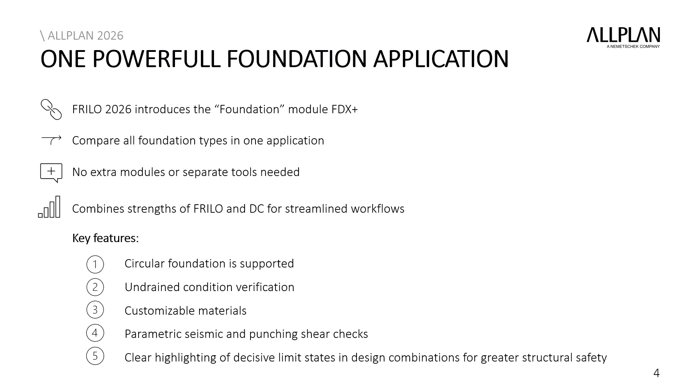By combining the functionalities from DC as well, we have brought together everything from both worlds, Frilo and DC, into one powerful unified program. There are also a few new features that we would like to announce as part of this update. Among them is the ability to model and design circular foundations. Smaller enhancements include, for example, the calculation of undrained conditions and user-defined material parameters that you can specify. And there are also parametric input options for seismic verification and for punching shear verification.

With that, I'd like to transition to the next area of expertise, the new features in the field of framework structures and steel construction. In our framework program RSX, there are many small optimizations in the input process, which we have summarized here for you in a clear overview. First of all, structures can now be mirrored in any way during input, and they can then be linked with the existing structure present before mirroring.

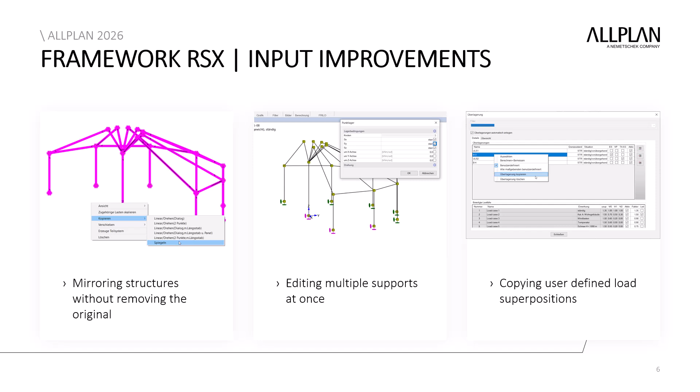Another optimization for data entry is the ability to edit multiple support points simultaneously. You can select several points at once and then adjust or modify their properties together in one go. In addition, you have the option to copy user-defined load combinations and paste them again so you can edit them afterwards. We have added an overview table for all load case combinations to improve clarity.

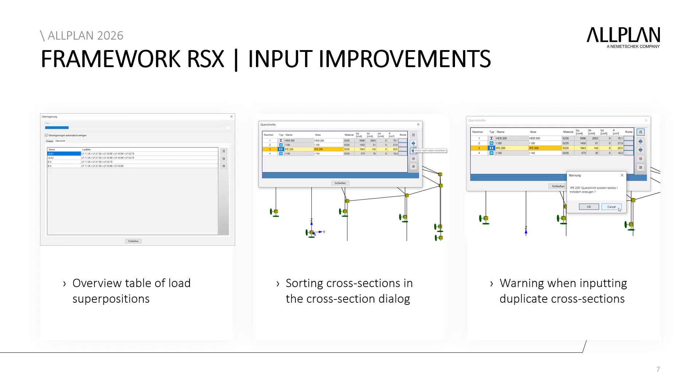This enhances transparency. Additionally, you now have the option to sort individual cross-sections in the cross-section dialog and to change and adjust their order. We have also implemented a warning in the cross-section dialog. If you define a duplicate cross-section, you will now be notified that the corresponding cross-section already exists. In the area of stability supports, we have added a visual preview to the input section to make data entry easier and transparent. In addition, member bars that are connected to a load panel can now be split into multiple member segments.

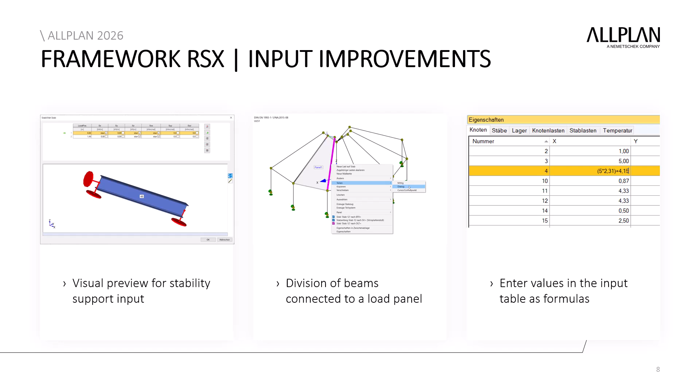Last but not least, we have added the option in the table inputs to enter formulas for the calculation instead of specifying the exact target values.

The next project from the area of program harmonization comes a unified, powerful steel connection program. To this end, we have combined all of Frilo's steel connection detail programs into a single program for design purposes. Options such as fin plate, end plate, splice joint, welded and bolted frame corners, typified connections, as well as the steel angle connection and the splice plate connection have all been harmonized into a single application.

Of course, you can also switch between the different types here. And of course, it is also ensured here that you can open all positions and all details that you created with previous versions within this new application. In addition, the unified program will of course offer the possibility in the future to be coupled and connected more easily and effectively with other applications.

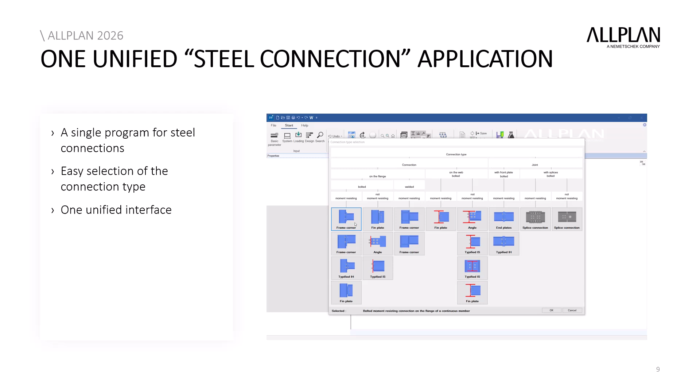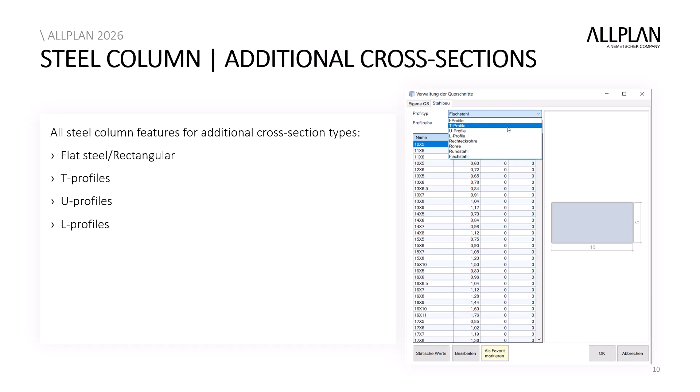Another innovation in the field of steel construction is the addition of new cross-sections in our proven steel column program. We have implemented 4 additional cross-section types there: rectangular flat steel profiles, T profiles, U profiles, and L profiles. With this expansion, we have now implemented all cross-sections described in Eurocode 3 for the design of steel columns. With that, I would like to transition to the next specialist area.

And at this point, I would now like to present to you all the innovations in the field of reinforced concrete construction. We will start with a new edition of the Reinforced Concrete Cross-Sections program. We have added new national annexes for you there. These are the national annexes for Belgium, the Netherlands, France, and the Czech Republic. Of course, before that, we already had the German and Austrian national annexes, as well as the annexes for Great Britain and Poland. And we have also implemented the base Eurocode so that we can now offer a very wide range for international projects.

At this point, it is especially worth mentioning that with the reinforced concrete cross-section verification, in addition to the usual verifications in the ultimate and serviceability limit states, such as bending with axial force, shear force, torsion, crack width, and stress verification, you can also perform fire design for rectangular and circular cross-sections using the general method. In addition, you can select the analysis of cross-sections with in situ concrete additions and with user-defined materials, as well as the calculation of effective stiffnesses.

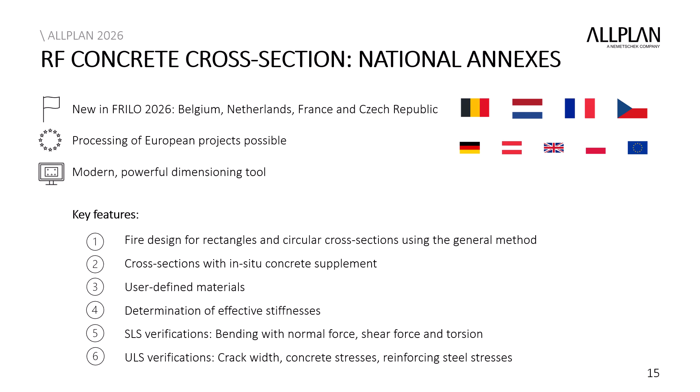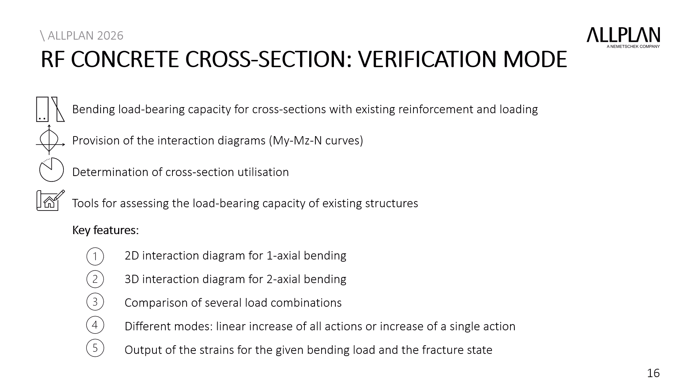It should be emphasized that the diagrams are two-dimensional when selecting uniaxial loading, while the interaction diagrams are spatial for biaxial bending. Within the diagrams, you can display multiple load combinations and choose between different modes. For example, this involves increasing the moment and the normal force linearly, or for example, to keep the normal force constant and determine a limiting moment instead. Another new feature is that now the strain is displayed not only for the failure state, but also for the current loading condition. With that, I'd like to move on to the next innovation.

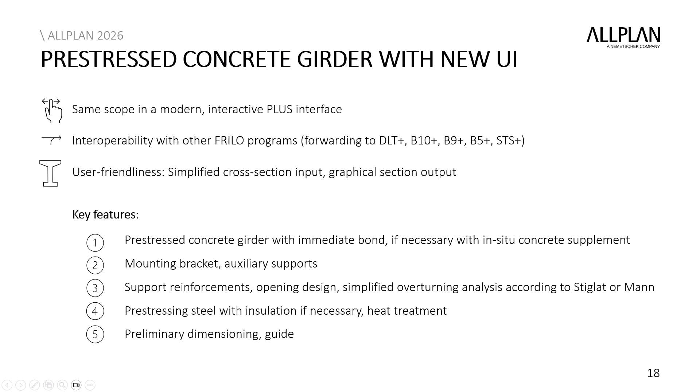Features for preliminary design and the guide with tips in case verifications are not met are also retained in the new program. The Plus interface also brings several advantages, such as interoperability with other Frilo programs, just as you are used to from the Plus environment at Frilo. In addition, a few simplifications have also been made to improve user-friendliness.

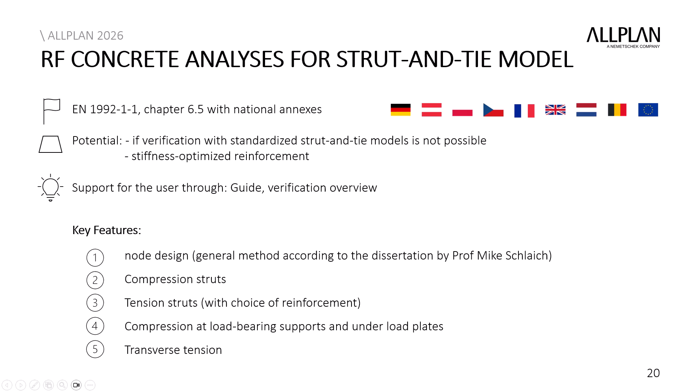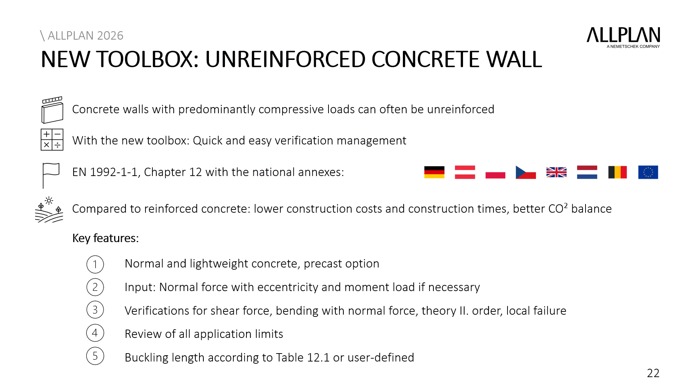In the area of toolboxes, we have implemented another application for the calculation of unreinforced concrete walls. The aim is to be able to construct predominantly compression-loaded concrete walls without reinforcement, for which we have implemented the regulations from Eurocode 2, Chapter 12, including all national annexes. Compared to reinforced concrete, unreinforced walls are subject to lower construction costs, result in shorter construction times, and also have a better CO2 balance.

This brings us to the last point of updates, which also represents a very fundamental adjustment within the Frilo software. With version 2026, we have implemented a new licensing system in our software. Since all customers are affected by this, we would like to briefly highlight the key features at this point. In the future, when you log into the Frilo Control Center, you will see at the top here in the ribbon bar a notice about a required login. You have already been informed in advance about how to log in there.

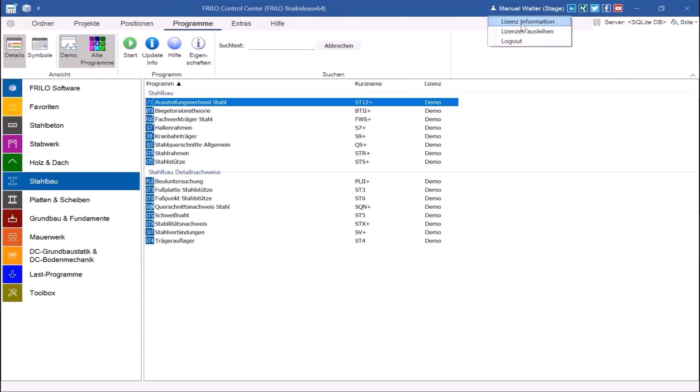After starting the Frilo Control Center and clicking on this login button, you will be redirected to a single sign-on process, where you will need to enter your customer data that you previously defined. After successful registration, you can access the available license information within the Control Center. At this point, it is important to point out the 3 different license modes.

As an existing customer, you have previously licensed individual programs. The license mode behind this is the program license mode shown here. There you will find all individual Frilo applications that you have also previously licensed. With version 26, we will also be implementing new modules and additions. Should you add new modules and additions or are a new customer, then you can select the appropriate license mode here.

To summarize, I would like to briefly go through everything once more. Module licenses are smaller program packages that you can purchase starting from version 2026. Edition licenses are Frilo editions, professional or ultimate, that you have acquired starting from version 2026. Everything you purchase before version 2026 can be found under the license mode, program licenses.

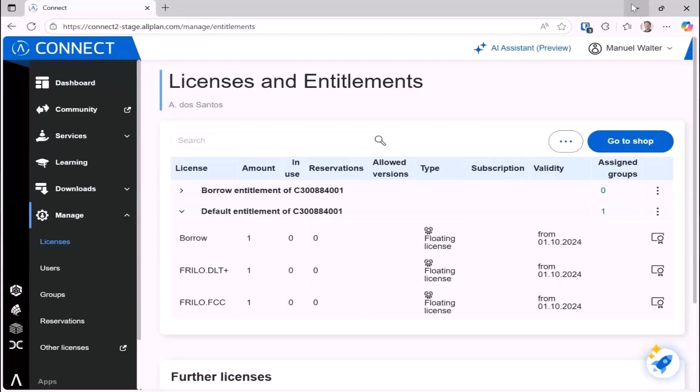Additionally, you can view and manage individual licenses in our customer portal, Connect. To do this, log into the Connect customer portal and go to the Manage Licenses section to get more information about the available licenses. The topic of the new licensing system was already explained in a separate webinar in the past. If you missed it, you can find the recording on our website.

In conclusion, I would like to point out that all the innovations mentioned are also described in detail on our website.